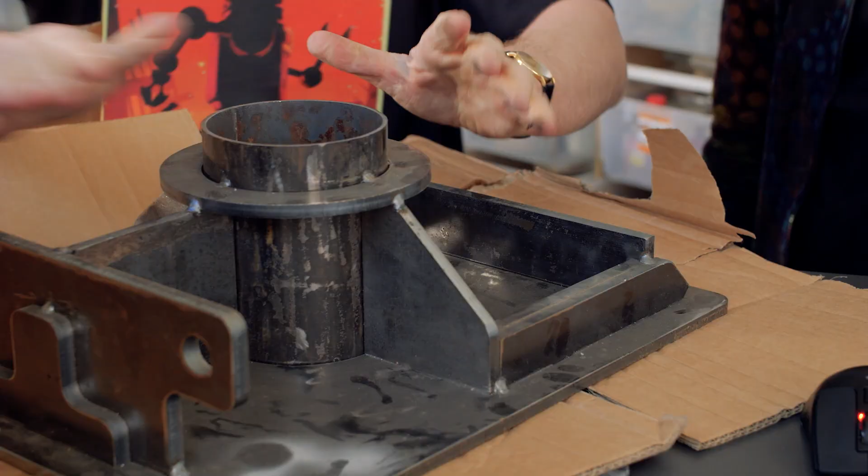Great. Here's the piece. This is my prototype, and I need it welded. All right. I need a circular weld around here. I need the internal seams. I need this thing here, straight weld. And I need this wobbly weld over here. I'll show you now. Let me just move it around. See that? Yes. Very nice. I need all that welded.

Okay. So, my team has put together the 3D model, right? Can you load that in? I can. Yes, there it is. Let's take a look what you have. Okay. I'm adding the model. It is currently being analyzed for potential welds. May take some minute. It is already done. Oh, great. Okay. You have the same part.

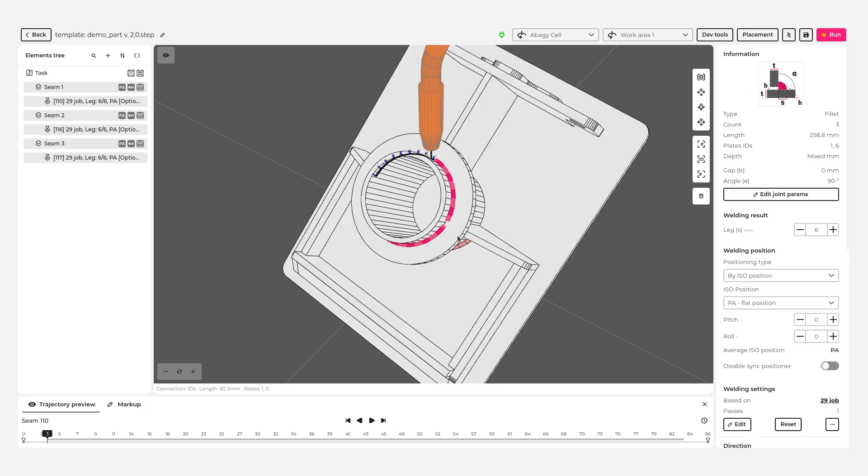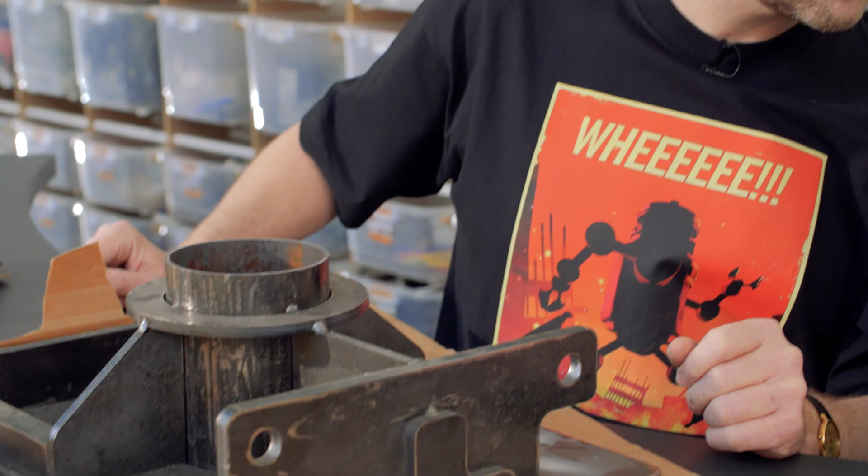So, we need to select the circular weld. Okay. Great. We have it. Then internal seams. Yeah, boom. Merge them. Very nice. This one. Yes. These as well. Connecting all around, contiguous. Now, the wiggly one on the other side, this guy. Yeah, okay.

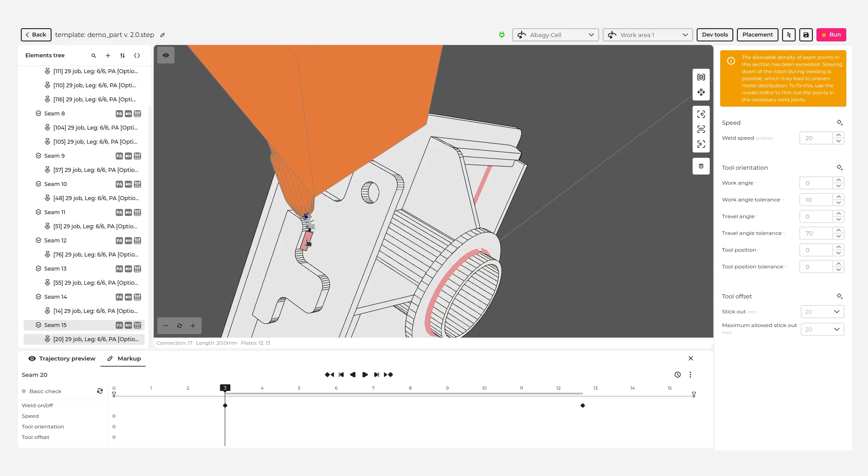I want a couple hundred of these done for my positive vibes machine. Yes. You need more positive vibes. Oh, yeah, the whole world nowadays needs it, right? What we need now is seamless, seamless seams, flawless, smooth welding.

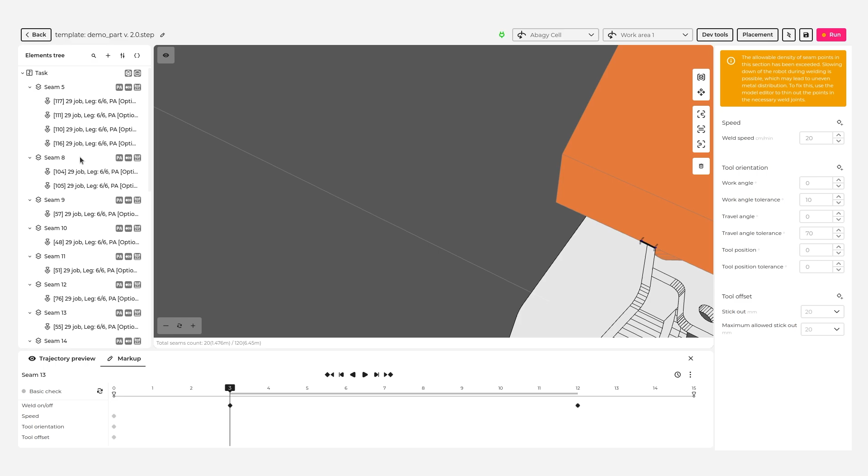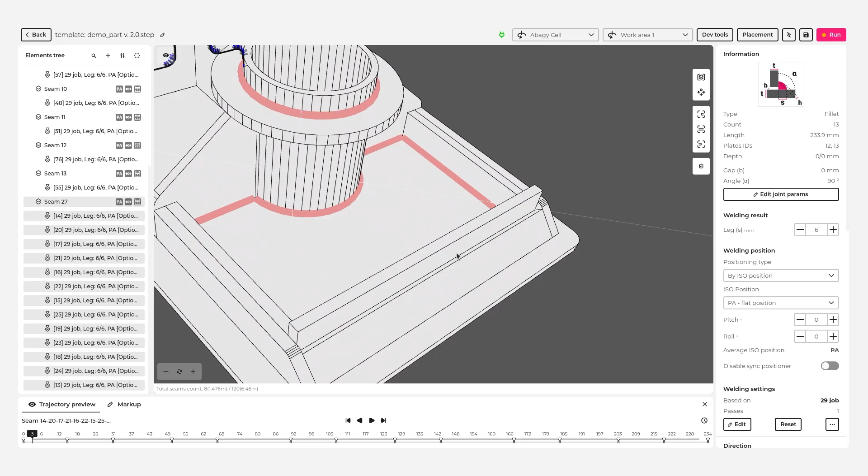Okay. So now I've selected all of these smaller welds with tricky geometry, and I will group them so they will be welded at once without arc interruption. Well, that'll save time. Oh, I remember you want this weld as well. So now we also want these welds, these ones. Oh yeah, that's right.

I should have asked how much all of this costs, by the way. I will tell you that our project managers should know that.

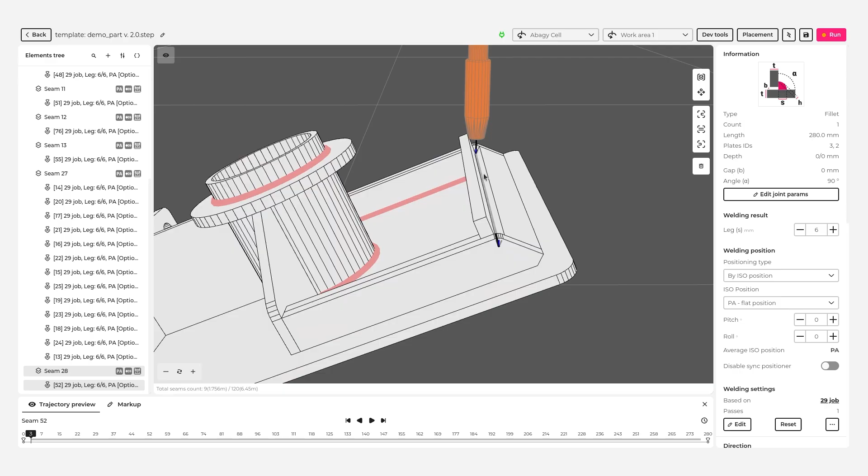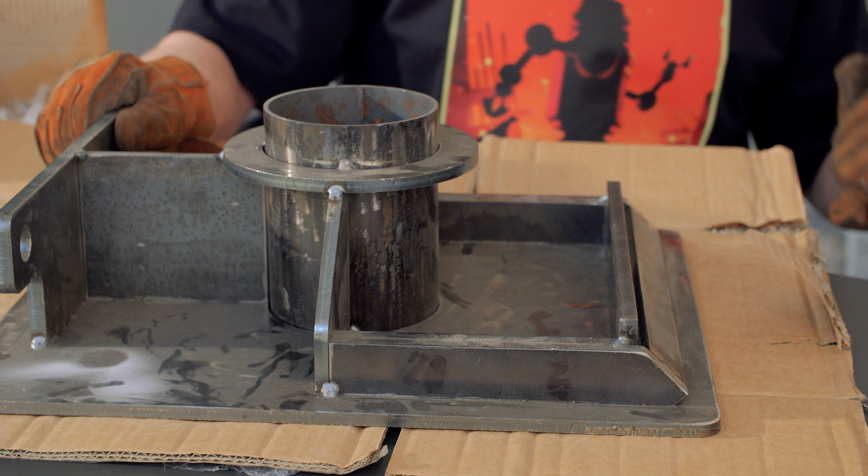I also have added this tricky seam, and you see that in default orientation of the torch, the nozzle actually overlaps with the part. You're talking about this one here? Yeah, this seam there, that internal tricky zone. The default angle we have, it's actually having the nozzle hitting this wall. So we want to change the work angle to avoid that. You see? Sometimes your nozzle is just too big. Okay, should work.

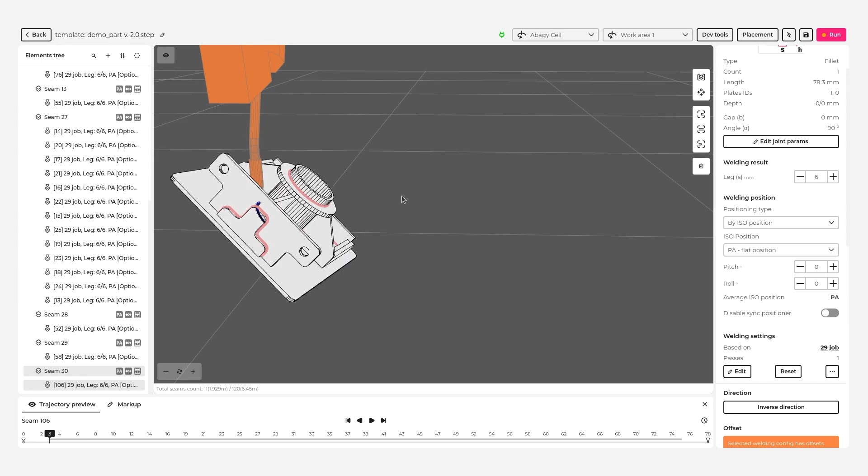And now you want these welds to be welded without arc interruption, okay? As one seam. One continuous smooth seam. Let me do that for you. Because once we do it once, we'll be able to do it for the entire batch, which could be 100, 200 pieces, just like this. And you will have like 1,000, 2,000 customers more with Abagy. We'll come back to you.

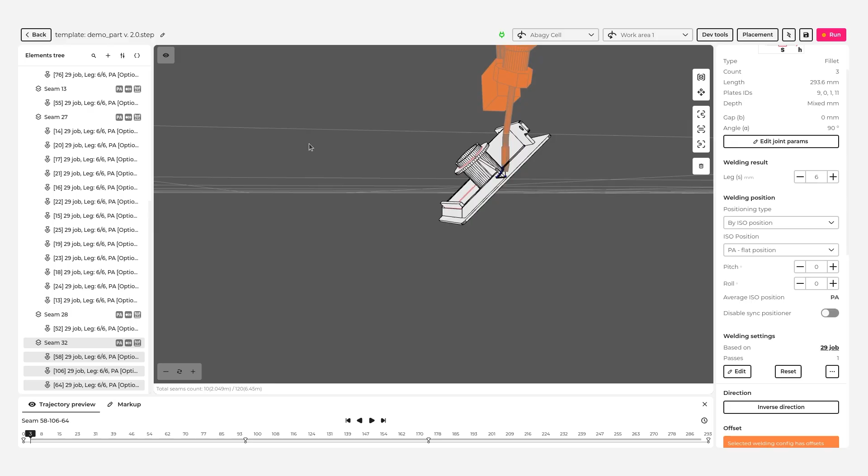I selected three welds and now I merge them, as I did previously. Great. I will do the same with the opposite side. Okay, I have created three welds. Now I will merge them.

My work, which I'm currently doing, is done once for a part, and then you relaunch the same program again and again without need of so much manual work. You can save this in your system as Positive Vibes Inc. Piece 1, and just click and repeat every time we need more units. Amazing.

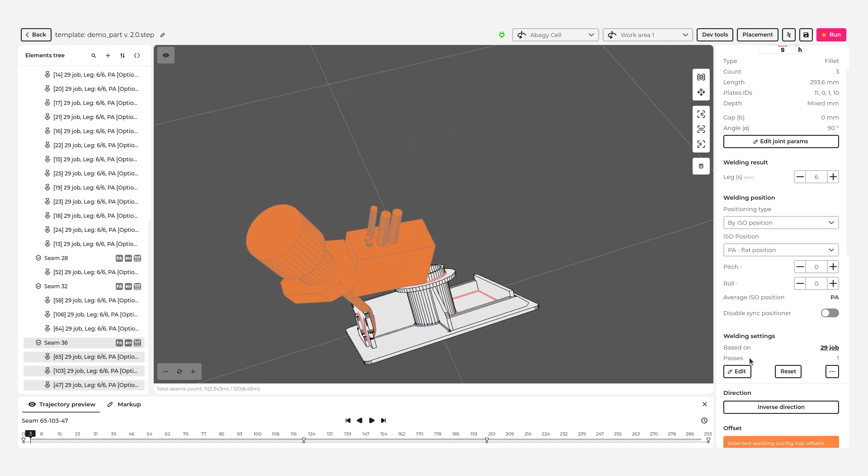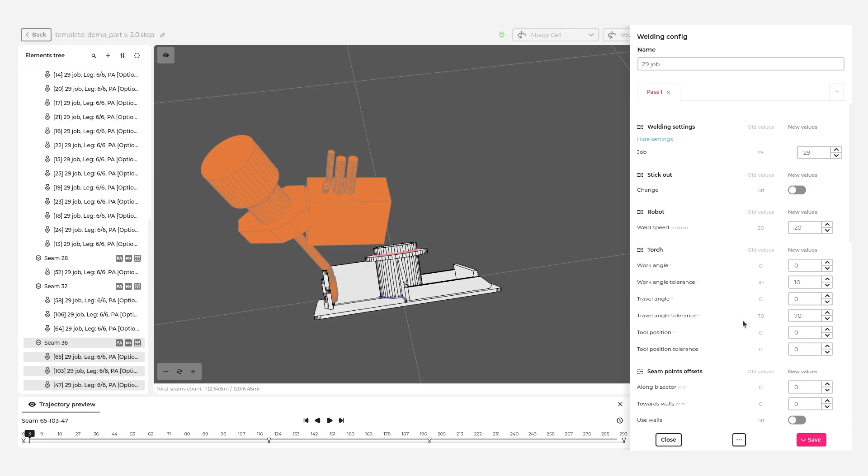I have the welding parameters, default ones for our cell. I believe it should work for you. And if you want to change some parameters, you may do it for a particular weld or for all the welds with the same geometry. What if you wanted to change thickness of a weld seam? We may do that by changing the speed or other parameters. I may make this one smaller. Do you want me to do that? No, I'd have to run that by the technical team.

So now we have all of these seams prepared except for the scanning. Laser scanning requires a special thing.